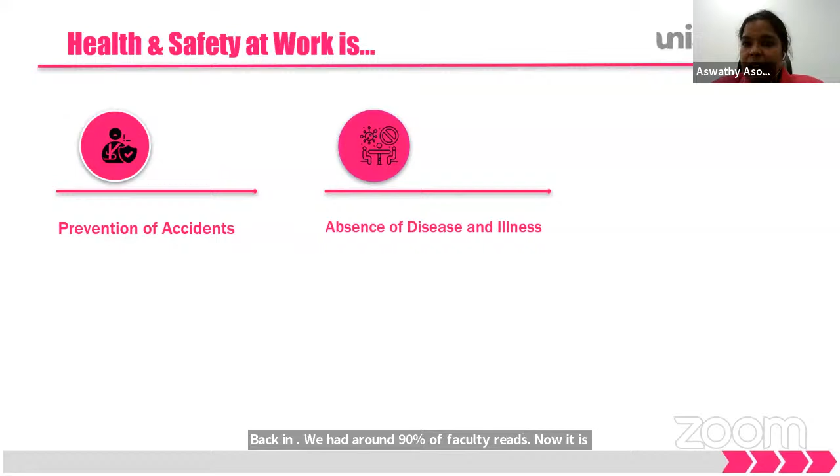From what I've understood from the industry, health and safety is very important. Back in the 90s, we had around 90% fatality rates, and now it's reduced to 75%. So why are we still focusing on health and safety? Because there are still lots of fatality rates. If you are alert and cautious enough while working, taking care of yourself, many simple things can actually make a big change. This is why health and safety is very important.

So what is the main factor? What do you need to look at? Make sure there are no accidents, we don't need any accidents, and we should make sure there is no absence due to illness.

Then we have to consider physical and mental well-being. Over the years, I've seen that when people speak about health and safety in any industry, they speak about accidents and physical injuries, but no one ever bothers about the psychological issues and psychological injuries. These are also equally important as accidents or physical injuries.

So what to be done, and how? In order for a team member or worker to work properly and happily, his working environment should be good enough and encouraging, so that the worker's productivity can be increased. So health and safety is not just about physical injuries and illness—you also have to look at the physical and mental well-being of the people.

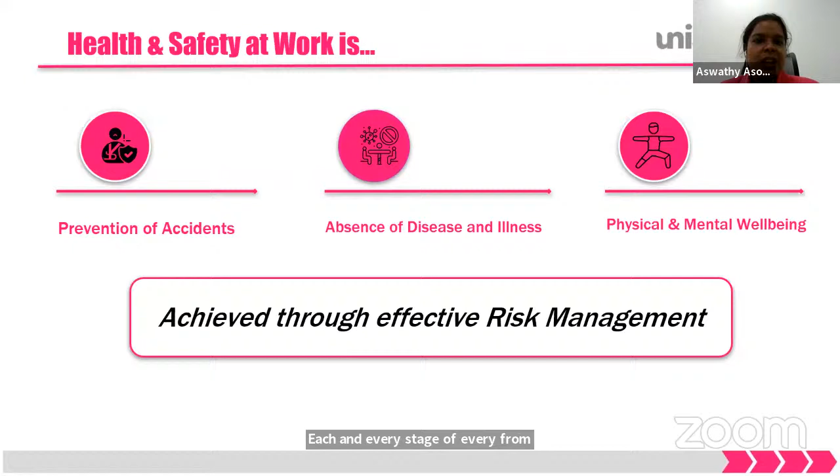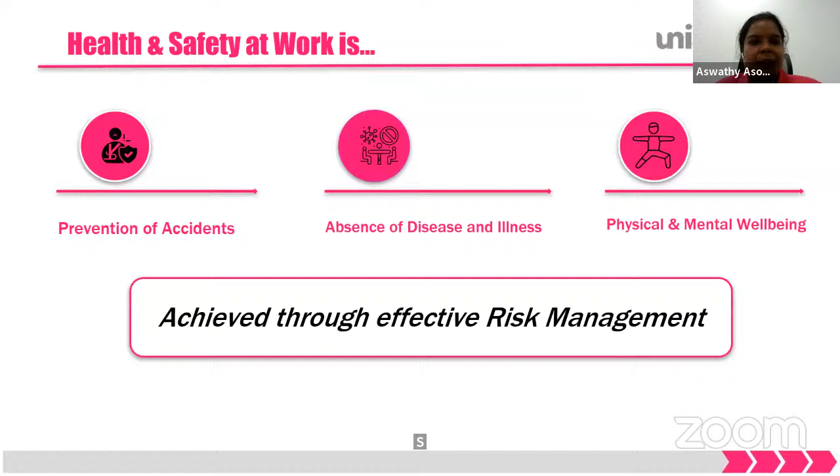No—health and safety, method statements, risk assessment, everything has to start from stage two of the RIBA plan of work. What is stage two? The moment you start designing the building, once your objective is clear for what reason you're constructing that building or utility, you have to have an idea about the risks involved—during implementation, after construction, during maintenance. So from the design stage itself, health and safety has to be considered, with a proper risk assessment before starting any work. Health and safety should begin from level 2 of the RIBA plan of works.

Now, what is HSE, the Health and Safety Executive? They are the monitoring committee. What is their responsibility, what do they do? They give us a proper policy, they check, they give us proper communication to make sure they lead us as an example. If any issues happen, like an accident, they cooperate, they comply with the rules and regulations, and they inform us what has to be done.

And then you plan the works ahead—if you face a new issue, you understand the problem, you plan ahead, you think before you act. This applies even to minor things. For example, in many residential buildings, if you go to a building and get into the staircase, you can see that the landing has been kept as a storage area.

They keep all their cartons, waste and debris and everything. Let's say there's an electrical short circuit, due to which the lifts will not be working at that time. Then the only emergency access is through the staircase. How will people move out safely? So these are things we can actually prevent. It shouldn't be there at all. If you look into it, it's very simple and completely avoidable.

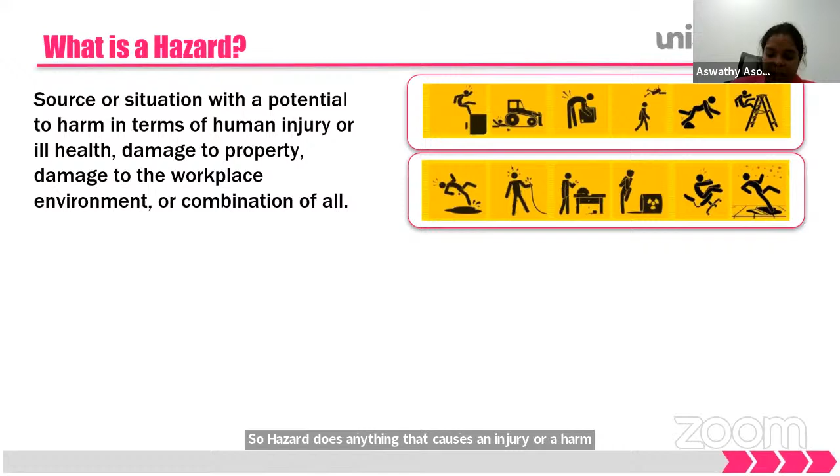So it can be broadly classified into different categories. One is physical hazard, basically moving parts, height, noise. Biological viruses, as you know, COVID, Nipah, many kinds of viruses. And you have chemical spillage, paint, asbestos, or any other kind of thinner, these kind of things.

Then ergonomic, it's basically improper workstation. You are not given a proper height, not sitting in a proper workspace wherein, according to HSE rules and regulations, each and every employee, if sitting in a workstation, has to have at least a 1 meter square area for relaxed sitting. Whether the chair is good enough. When using a laptop, make sure the screen is exactly straight to your eyes. You're not bending yourself so that the spine is not affected.

As I've already told you, psychological effects in construction industry are quite common. We are trying to become very polished and professional, but mind you, any part of the world you go, for the construction industry, we are still in the barbaric period, to be frank enough. Not even 19th century. The people are being abused. They just shout to each other. They don't understand each other.

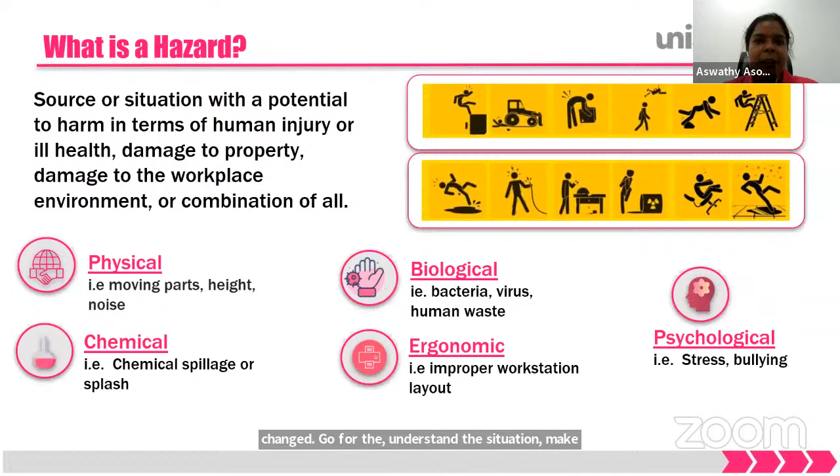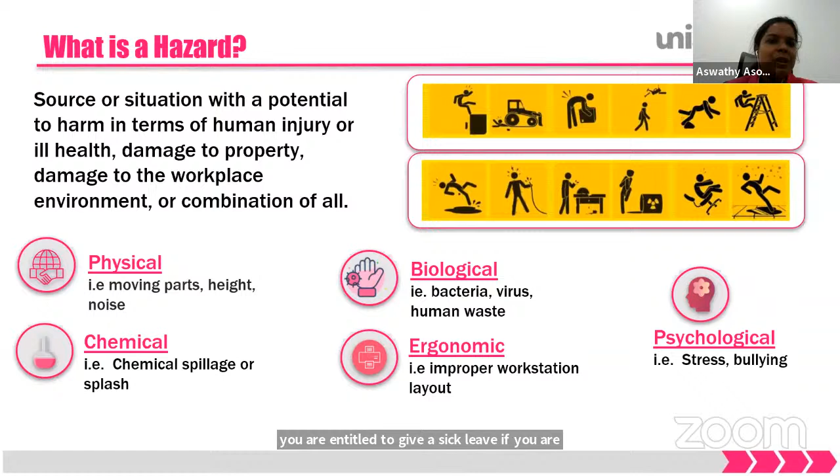Speak politely, professionally. If it is not done, give a memo, make sure a warning is given. Every time, you don't need to shout and fight to get the works done. So stress and bullying is again a major psychological issue. In England, you get stress leaves, because you are entitled to sick leave if you are completely stressed. But in the Middle East, I fear whether you have that, and I literally fear if it is there in other Asian countries also. So these are the various hazards involved.

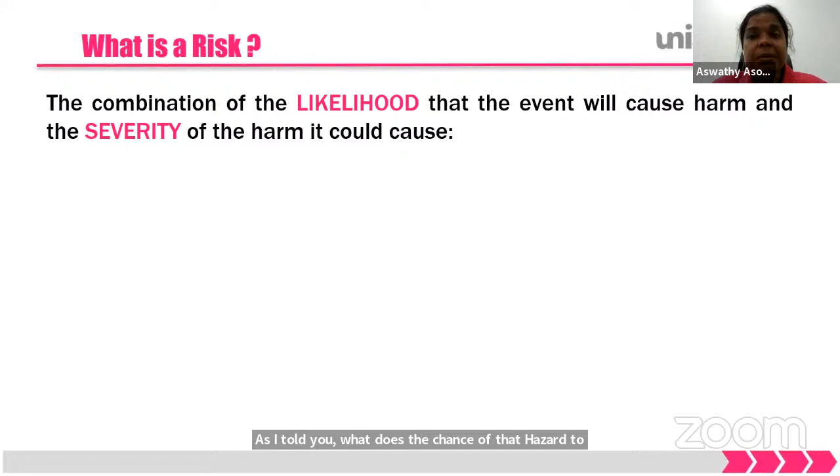Now, what is a risk? Let's explain further about risk. Each and every, as I told you, hazard has a chance of taking place, or a frequency of how many times it takes place. That chance is basically the likelihood.

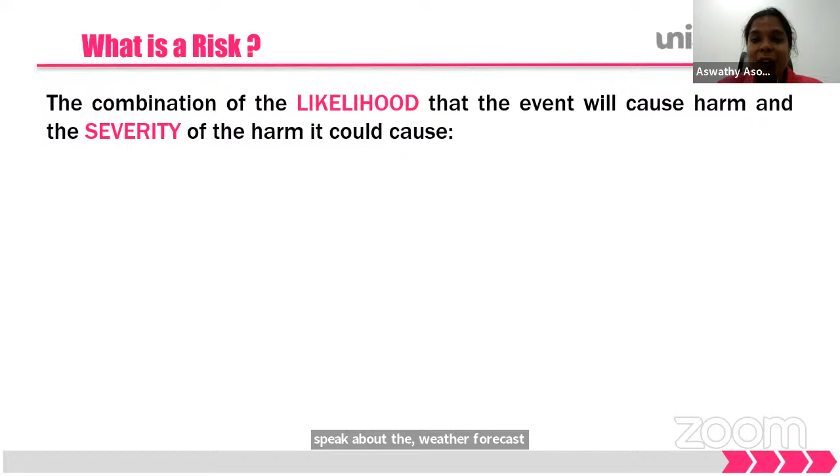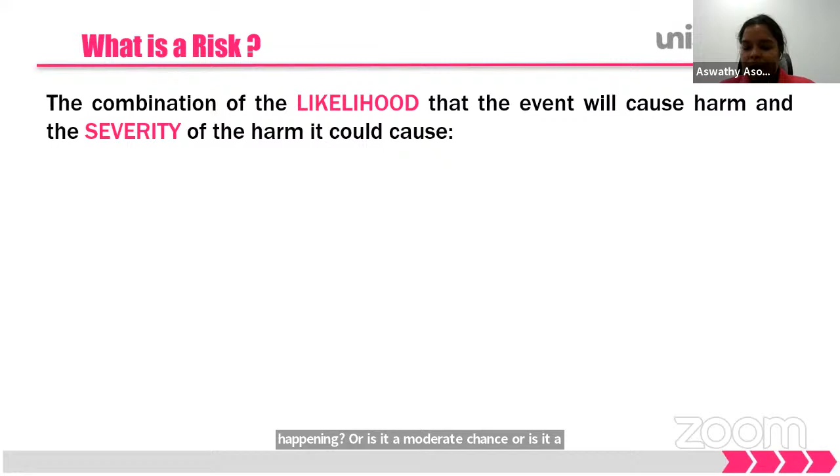Is there a high chance to do it? For example, the same way we speak about the weather forecast, is there a high chance for a thunderstorm happening, or is it a moderate chance, or is it a minimalistic, small chance? Similarly, we have high risk, medium risk, low risk.

So what are the high risk works? The high risk works are like working on an elevated platform, like rope work and all. And if you are working with anything underwater in a confined space, those are high risk.

So in order to identify what all are high risk activities, low risk activities, and medium risk activities, you need to have a proper risk assessment. Identify the issues, classify whether it is high or medium, then understand the frequency of how many times it is happening, and what are the control measures you take.

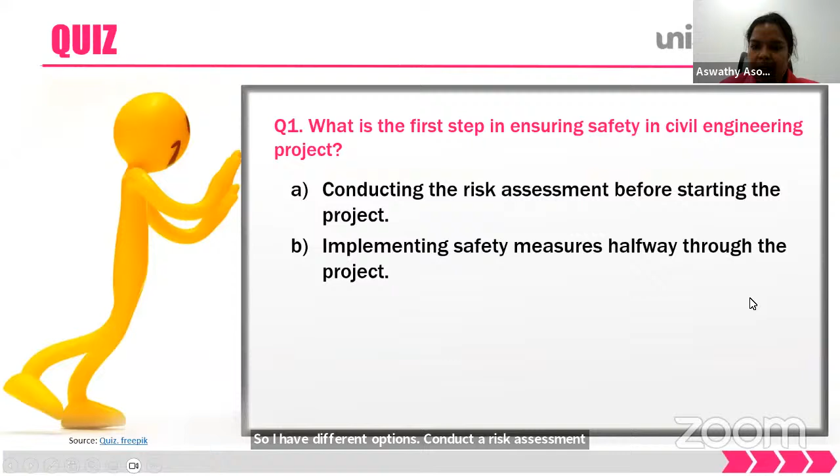What is the first step in ensuring safety in a civil engineering project? I have different options: conduct a risk assessment before starting the work of the project; implement the safety measures halfway; wait for accidents to occur before taking any safety measures; or rely solely on personal protective equipment to prevent accidents. Please put your answers in the chat box.

Let's repeat the question again. What is the first step in ensuring safety in a civil engineering project? Option A is conducting a risk assessment before starting the project. Option B is implementing safety measures halfway through the project. Option C is waiting for accidents to occur before taking safety precautions. Option D is relying solely on personal protective equipment to prevent accidents.

We can see many participants putting their answers in the chat box, and most of them are opting for option A, conducting the risk assessment before starting the project.

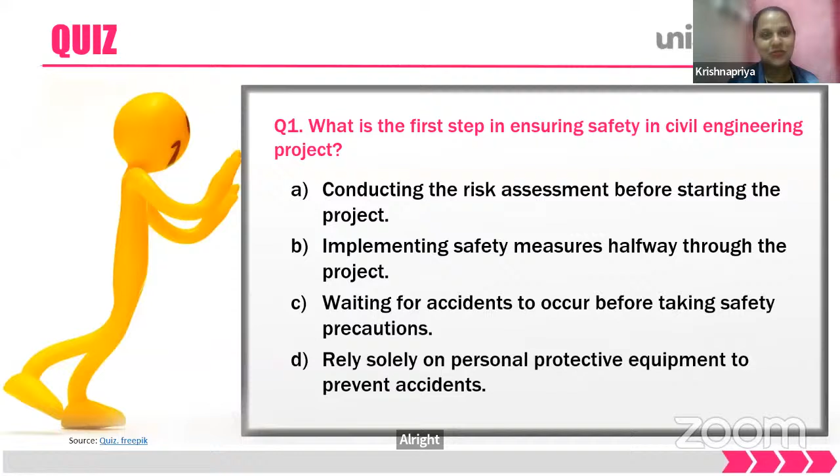Wonderful, very good. I don't know from which background you guys are coming, so I would take it as a personal comment that you are all listening to me. Yes, all are listening and they are putting comments for each of the questions. Thank you for letting me know about that.

Let's go for the next question. If the previous question is done, which is the most effective way to ensure safety in construction? Again, four choices: relying solely on safety regulations and guidelines; conducting safety inspection only after the project is completed; incorporating safety into the project design and planning stages; or ignoring potential safety hazards to save time and money.

It's a bit of a tricky question, so you can give two answers if you want. Dear participants, please put your option in the chat box. We have four options, I hope the question is visible to all. The question is, which is the most effective way to ensure safety in construction?

Okay, we are getting answers. Most of them are going with option three, incorporating safety into the project design and planning stages. Very good, so basically the answer is incorporating safety into the project design and planning stages itself. That's where you have to start, and it's the most effective way to ensure safety in construction.

How many answers did we get, like how many hands, if I may know? Many of our participants have responded in the chat box. Roughly, since I can see around 286 participants, so at least 100. We cannot count the exact response participants right now because it's a chat box. Okay, no worries, I just wanted to know the response factor, to know whether they're still there or have left.

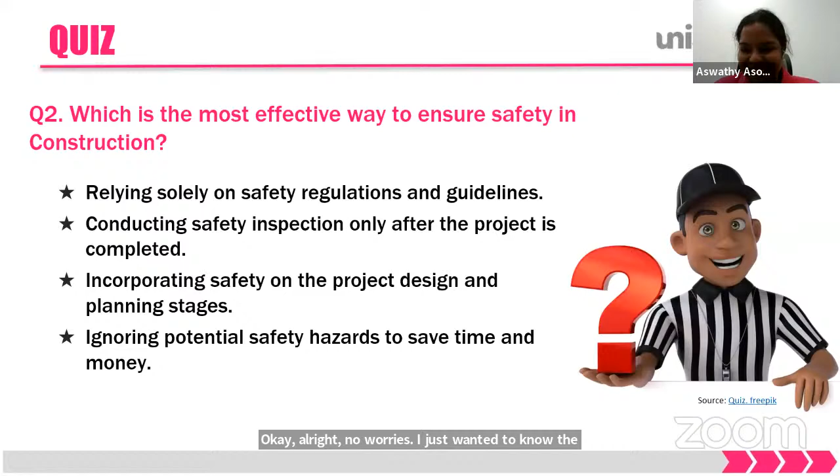Before starting the next one, I just wanted to ask, is my pace of presentation okay? Is my pace of lecture okay? Am I a bit too quick, or do I need to slow down? Is there any comment on that?

I think you can go ahead. Okay, Sashi, all right, it's okay. Thank you, if people are responding that it's okay. You're doing great. Wow, that's great. Thank you to know about that.

All right, so let's see the importance of health and safety. I'm not speaking extensively about every health and safety topic, it's practically impossible for me to explain here. So what I'm doing is I've identified a few important things for general awareness, which are usually happening in the industry, and we'll discuss that, then get into the environment part. So let's see the first major issue, which is a high hazard one.

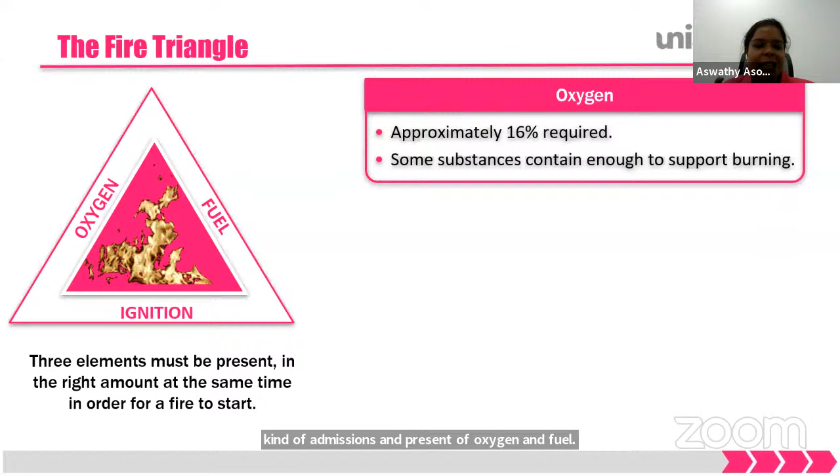It's basically the fire triangle. Fire is a major issue in the construction industry. It can be because of short circuit, or many reasons. So how can we stop it? How does this fire occur? The fire occurs because there should be a kind of ignition in presence of oxygen and fuel. How does it occur? Only if 16% of oxygen is present at ignition, then only does fire occur, and it should be highly explosive.

So what fuel is needed? It can be solids like wood, plastic, paper. Gases like petrol, gas, acetylene, poisonous gases. Then liquids, you have kerosene, varnish, turpentine, paints, which is generally used in construction. And if the heat is quite high, especially in the Middle East, the ignition can take place immediately, even for paper, because high intensity heat can cause ignition.

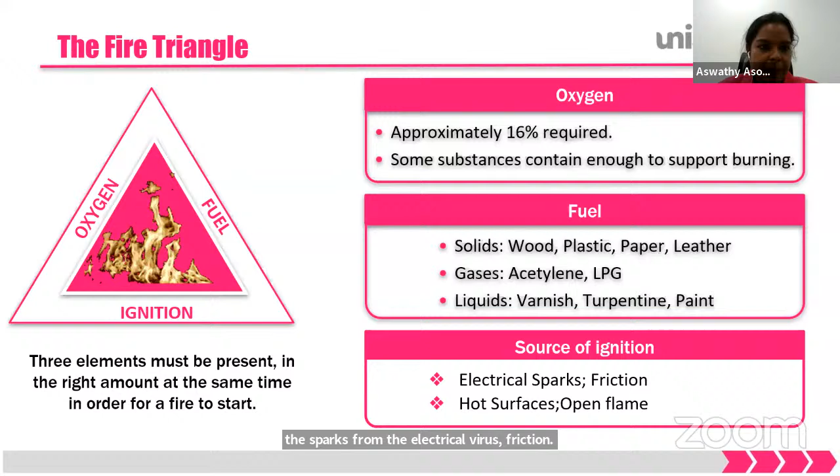So how does the ignition come? It's basically because of sparks from electrical wires, friction, hot surfaces, open flame, anything. So what do you have to do if there is a fire?

This is something everyone knows, but I'm telling you because when we conduct a fire drill, people just directly go to the lift, switch it on to go immediately, or they try to become very generous to help their fellow mates, acting like they are supporting and making themselves look big. To be frank, please don't do those things. If there is a fire hazard, just run.

Run means make sure you walk briskly, alert everyone that there is a fire, so pull the alarm first. Wherever you see the exit, just exit the building to the nearest safe area where they've already kept a board showing that this is an assembly point. Go immediately to the assembly point. You have to use only the fire extinguisher if you are trained to do it, otherwise just walk out immediately.

Because the doors used in buildings are at least 60 minutes fire rated doors. That is the requirement of municipality or the standards set, whether BS standards, Indian standards, or UAE standards. You have to have a 60 minutes fire rated door, which is basically for you to escape. So if you know how to use a fire extinguisher, use it, otherwise just leave it. If you are really confident, then do it.

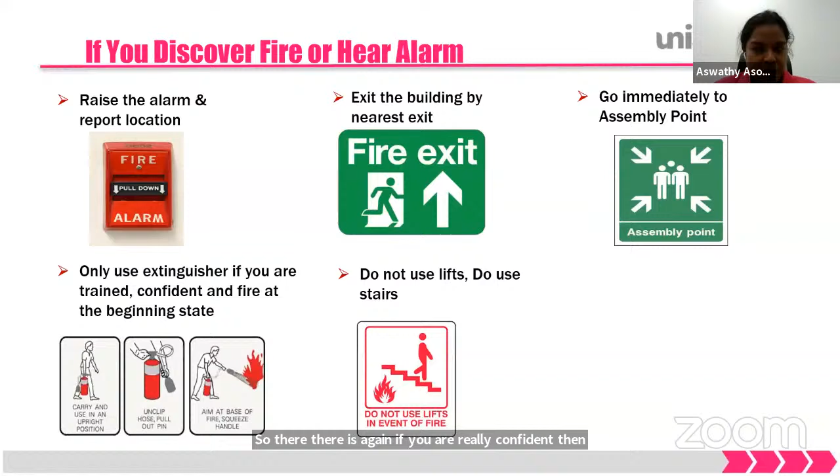Do not use a lift, go with the stairs. And if you are safe, then only assist the differently abled people or anyone who needs help. First, make sure that you are safe enough to save others. So this is how we actually have to respond if there is a fire.

Now, working at height. Working at height is one of the major issues when you look into the records, the data, the journals. You see that 70% of accidents occurred mainly because of working at height.

Again, you expect that working at height is like cleaning the facade, standing elevated on ropes, at a height of 15 meters, 25 meters, 30 meters. No, it is purely not the case. The most fatality rates are coming from working at height, falling off from a height of just 1 meter, 1.5, maximum 1.5 meters, and workers are severely injured.

So why is it like that? You have to make sure proper precautions are taken, and we work accordingly, thinking in our mind that safety is ensured. So what are the hazards involved?

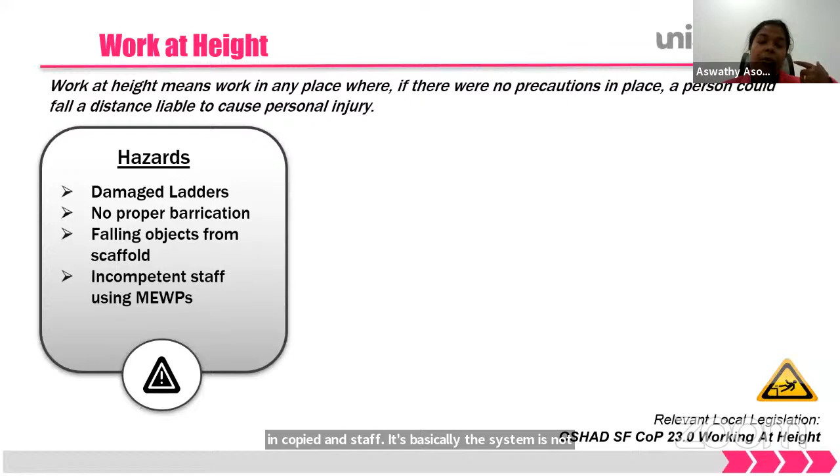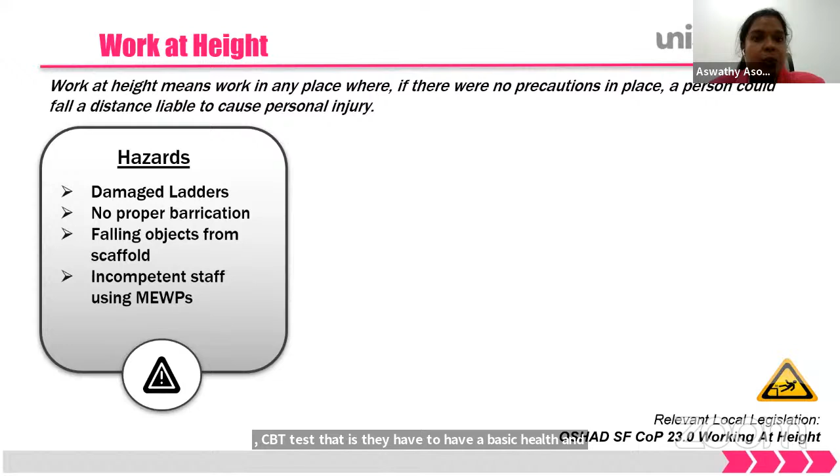If you go to Asian countries, the workers and laborers are completely illiterate, and they come to earn their daily living. So you can't complain that they are unqualified and incompetent, because the system is not there. Whereas if you go to England, anyone who works in the construction industry has to have a CBT test - a basic health and safety course. They have to pass a test in order to start working in the construction industry, which I've not seen anywhere else. That's again a system issue.

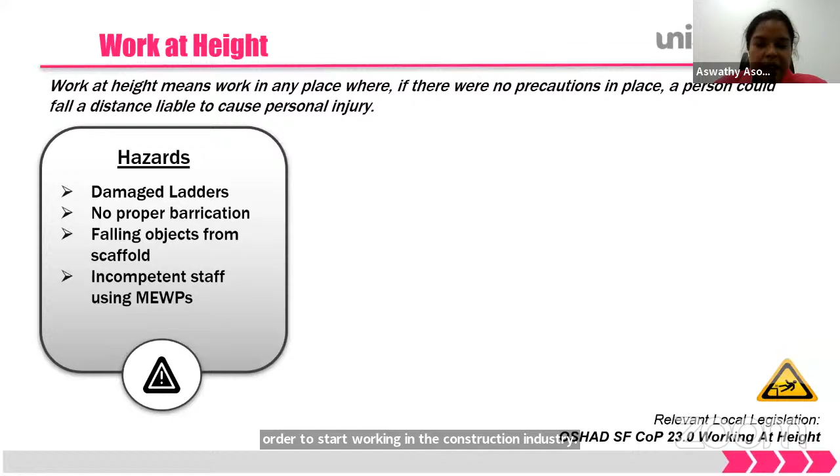So these things are happening mainly because of incompetent staff using mobile elevated work platforms and all those things. How do you control it?

Try to eliminate wherever it is possible. The first time, workers will be negligent, they're ignorant, they don't want to listen. Keep on saying, implement, make sure the action is done, penalize them, give them warnings. It's a gradual process, but over time things can become better. Make sure you have a safe system of work, equipment selected correctly in accordance with health and safety, and do periodic inspections like PAT tests.

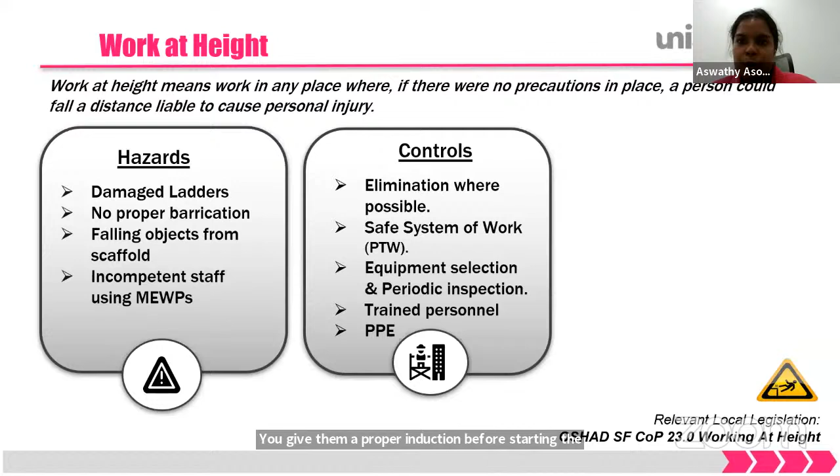Have trained personnel to train them. Give them proper induction before starting the work - tell them these are the issues, this is what you need to do, make them aware. Make sure you give proper PPE, personal protective equipment.

Now what are the risks involved? Falling from height results in fatalities. You may die, you may be bedridden for your whole life, or you may have a severe spine issue.

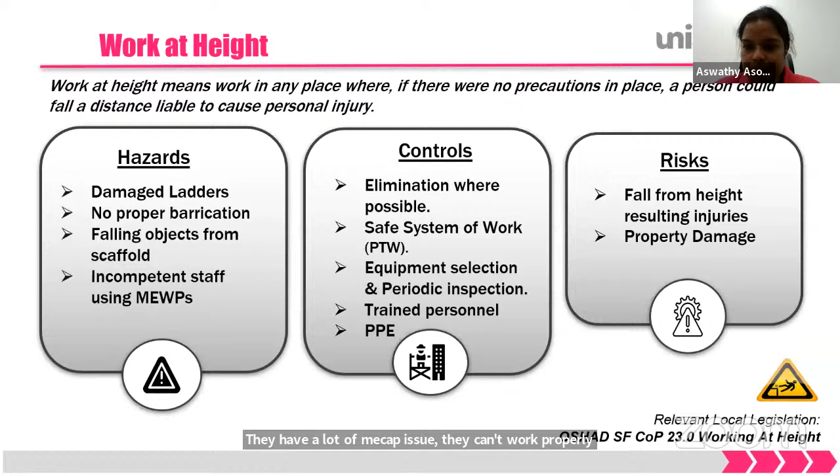Let me take a flooring example. A carpenter or floor layer is paid very high in European countries because their charges are high. What they do is fit a carpet and use their knee to hit it hard. They start this work at a very young age, 15, 16, 17, and by age 20 to maximum 30, they have a lot of kneecap issues. They can't work properly and aren't fit to work further. These kinds of issues have to be addressed.

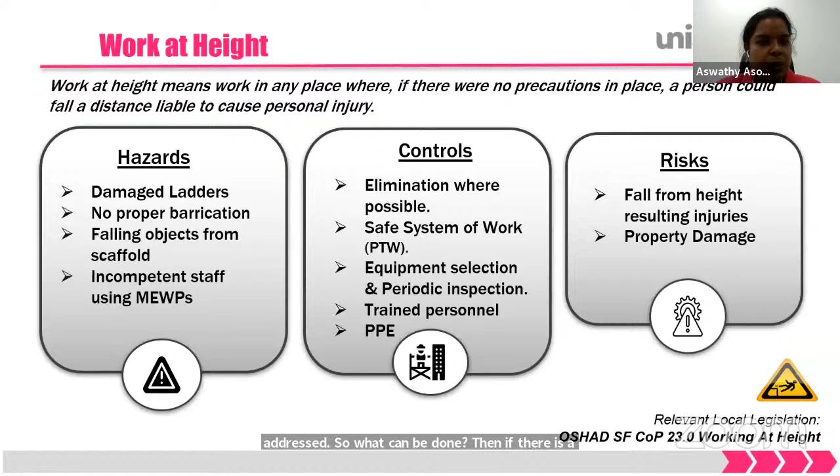So what can be done then? There's also property damage risk due to the work involved - these are the risks involved. Now, ladder safety - how to work efficiently.

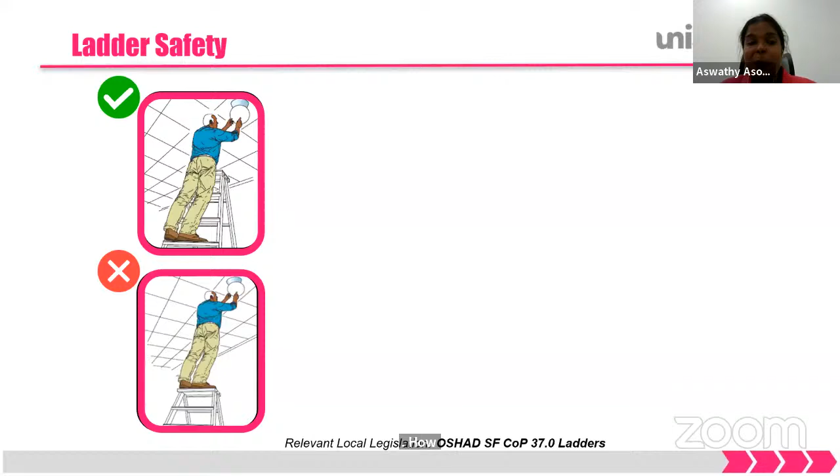You might feel it quite funny when I show you these things, but trust me, I have seen in several places that people are not using their ladders properly. Most people are not allowed to work with their feet on the highest elevated step at the top of the ladder. You should be working at least 3 to 4 steps beneath the top of the ladder.

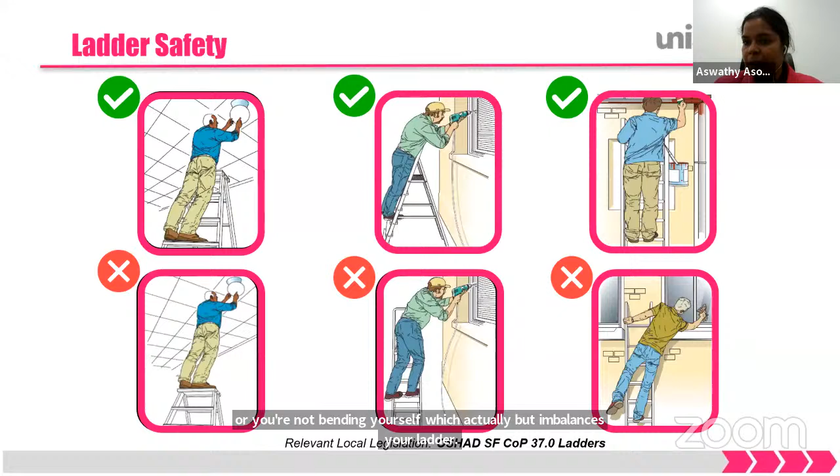Make sure that when you drill, the system is directly straight - you're not inclining or bending yourself, which actually imbalances your ladder and creates a high chance of falling. Make sure you're keeping your paint stand next to you so you can easily paint, and change position if you want to. Just focus on one segmented area. If you have to overextend or bend yourself, just replace your ladder position.

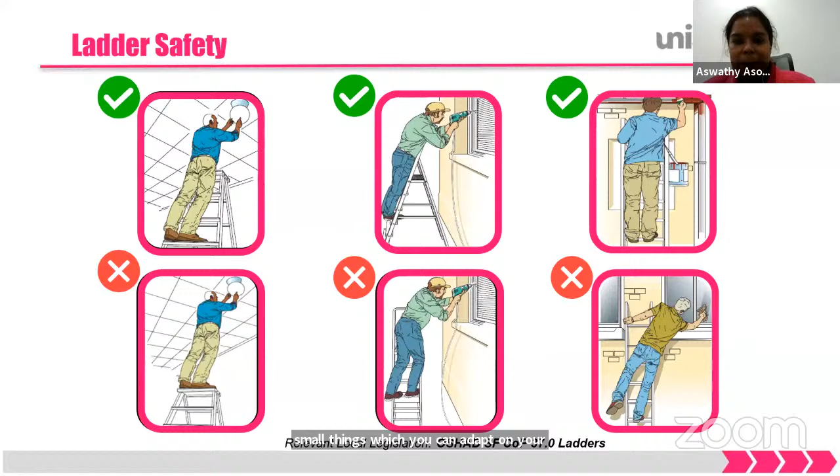So these things might feel quite adventurous to skip, but unfortunately it's not adventurous - it's just causing harm to your health. At a young age you won't realize it, but after your mid-30s and mid-40s, you will literally regret all those things. These are small things you can adapt into your day-to-day routine and explain to workers. Once this becomes a practice and a habit, then it will be good.

There will be hardly any issues.

Now let's take, when we spoke about working at heights, we covered ladders. Now let's speak about scaffolding. When it comes to scaffolding, where do we put it? On facades, to make sure that when we apply concreting and all those things, we need scaffolding.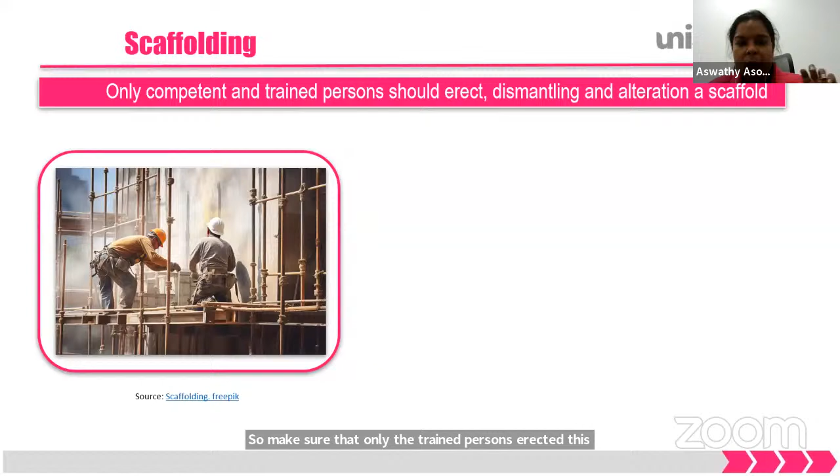Make sure that only trained persons erect it, dismantle it, or alter it, where you check the tag to confirm it is inspected and ready to use. There should be hardly any corrosion present, it should be tight and not loose. Make sure you have a proper method statement or standard operating procedure to work on it.

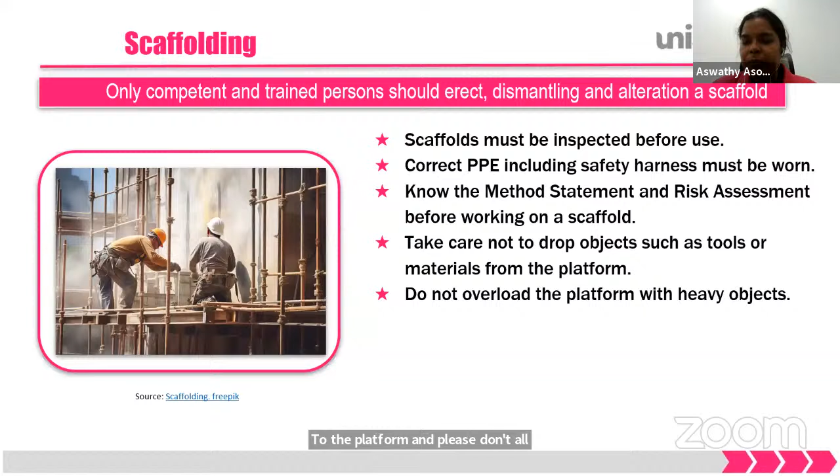You have already conducted a risk assessment. Take care and be aware that you are not dropping off any tools. If you are dropping off tools, there should be a net or other precaution measures so it will not fall down to the platform. Please do not overload the platform; take only the required tools needed. Do not overreach or overstretch yourself.

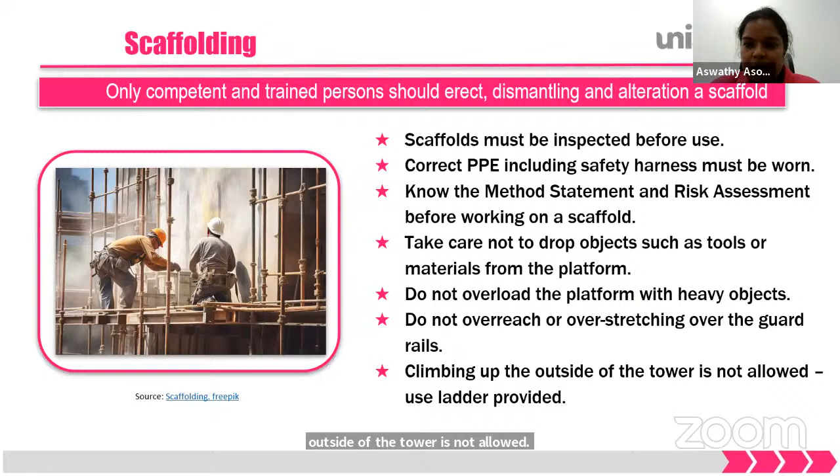Climbing up outside of the tower is not allowed. Use only the ladder provided. So make sure you do it safely.

Now the next one is mobile elevated working platforms. This is what a mobile elevated working platform looks like. This is basically used to clean facades, or you can use this for checking the structural stability of your facades. So basically it is used for external purposes.

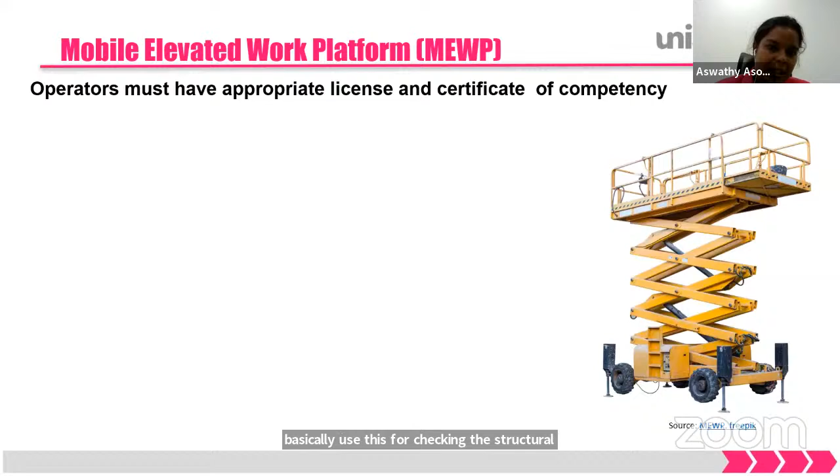So how do you make sure it is safe for our workers to work? It should not be placed in a confined area. The ground conditions should be good enough, firm, level and straight. The outriggers, that is where the wheel is lifted up, should be supported by four shafts.

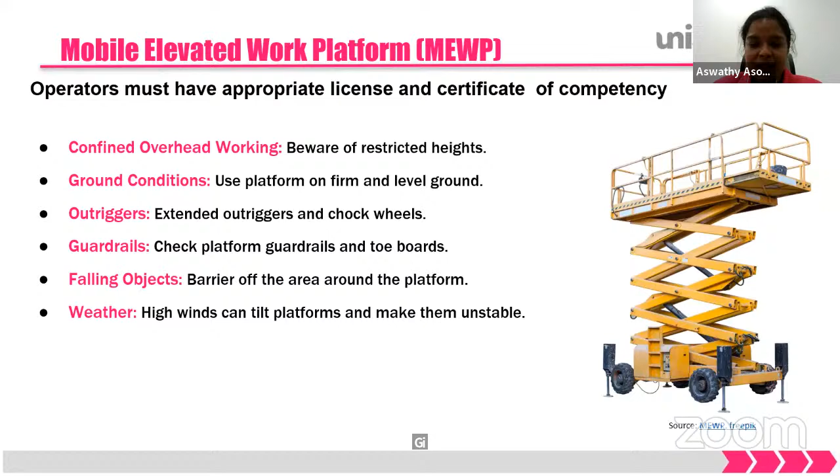You have kept a guardrail with the toe board and signage showing that work is in progress. You have preventive measures showing the platform barrier, a specified space given around the platform. Make sure you are not working in high wind, and handling materials are clearly distributed. Check whether only required materials are kept, sufficient for the work.

So basically, whatever method statements we discuss, the procedure is almost the same. All you need to do is identify hazards, make sure you're taking care of yourself, and you're not making a mess around. Please don't create a mess around. So if you have any nearby hazards, make sure you do not operate this mobile elevated work platform.

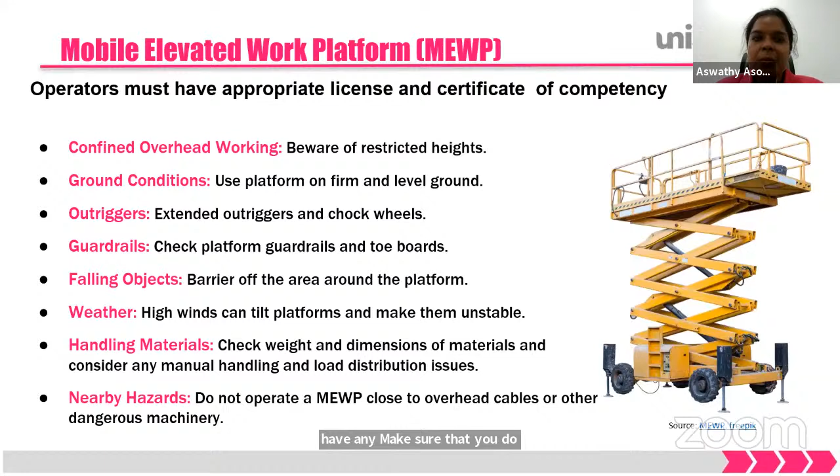Whoever is doing the rope cleaning has to have a Level 1 certification, and they have to be supervised and monitored by a supervisor who is accredited with IRATA Level 3 certification.

The procedure is the same thing: know the method statement, risk assessment. Make sure all the ropes are fit for purpose, tested, and have valid certificates. Continuously monitored by the supervisor. Make sure you have periodic inspection on the equipment, accessories, reports, and defects. You're not working during high wind time. There should be a proper emergency rescue plan in place, and make sure you have suitable PPE in order to work.

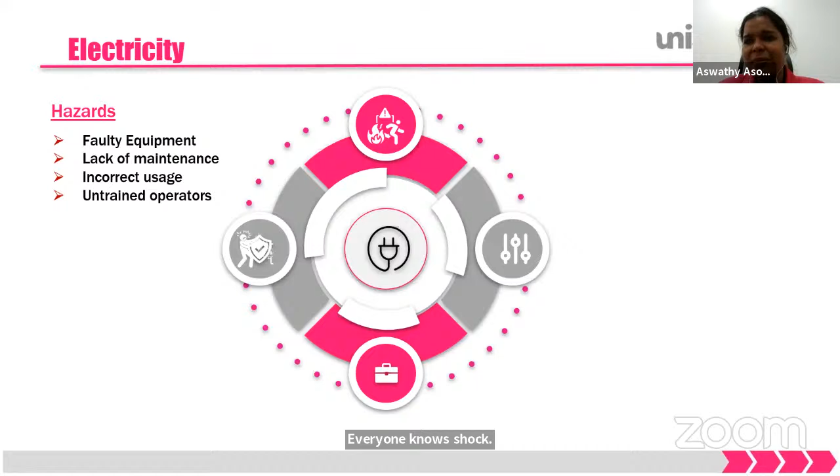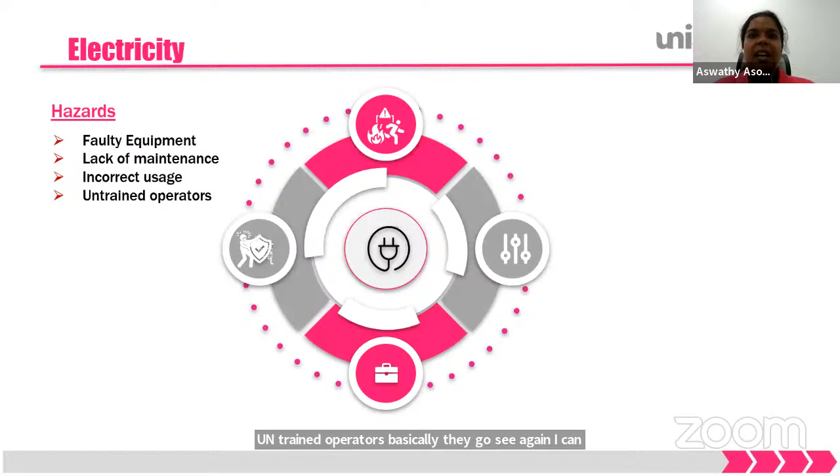Now the next high hazard observed is electricity. In the case of electricity, everyone knows about shock, faulty equipment, and no maintenance done. Incorrect usage of equipment, untrained operators. If it's a trained, skilled worker, diagnosing or identifying the issue just takes a fraction of a second.

There are places where, if you are looking into this, a trained skilled professional may charge high, but the time required for him to inspect and detect the issue and come up with a solution will be a fraction of the time as compared to a layman.

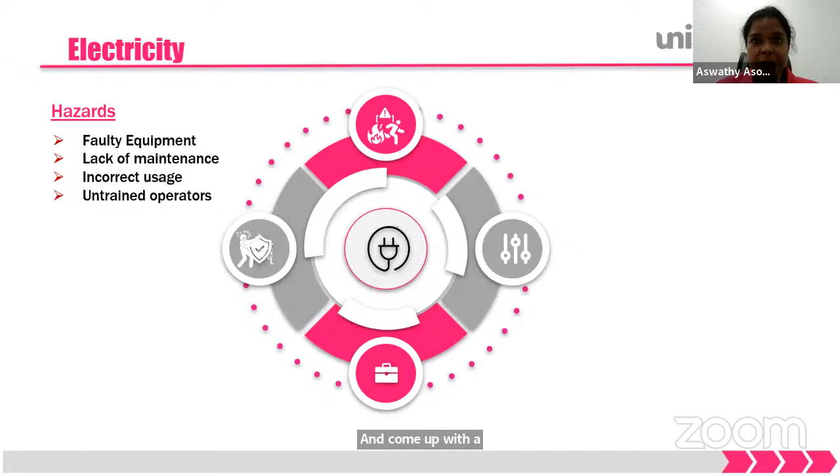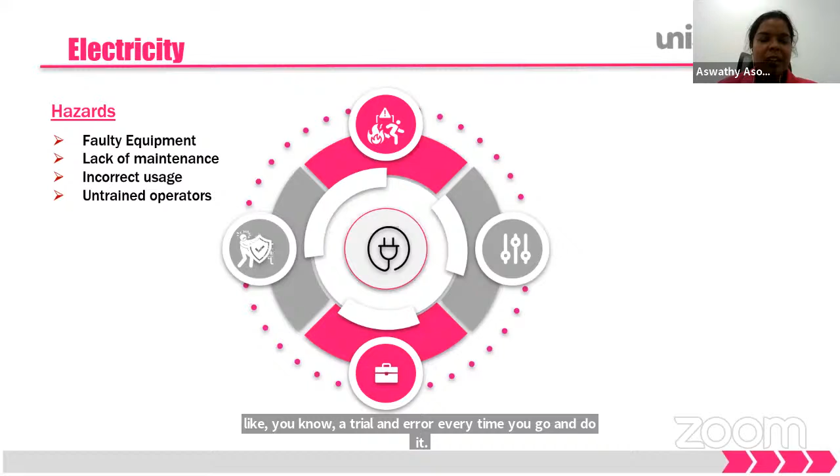For a layman, it may take a lot of time. It may involve trial and error, where every time you try something it does not work. So always make sure you have trained professionals to work on these things, because these are high hazards, and electrical shocks, burns, and fire are the risks involved.

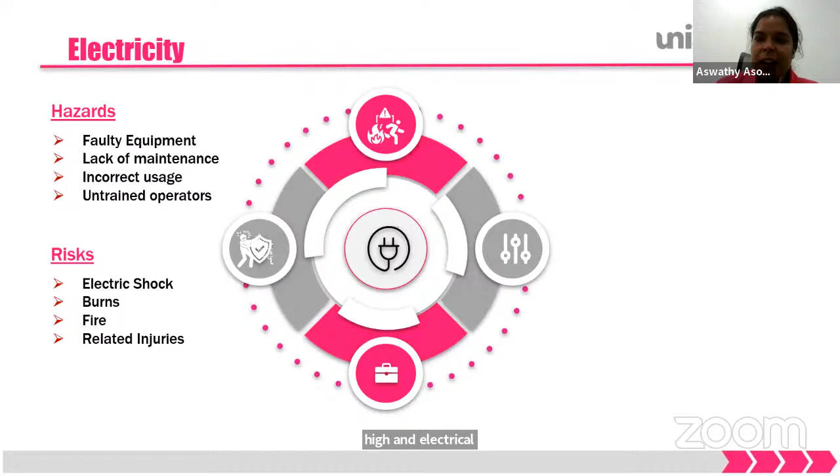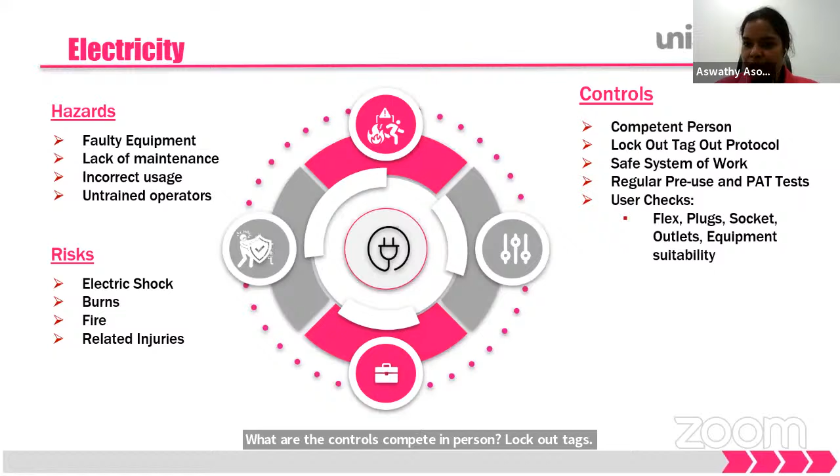What are the controls? Competent person, lockout tags, safe system operation procedures. Make sure you are checking pre-inspections. You have to check the flex and intensity of the flex, and make sure that the plug, socket, outlets, and equipment are all in working condition.

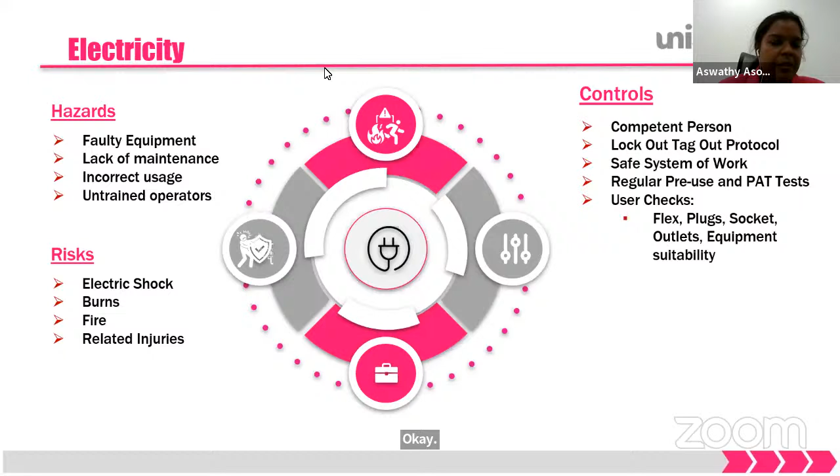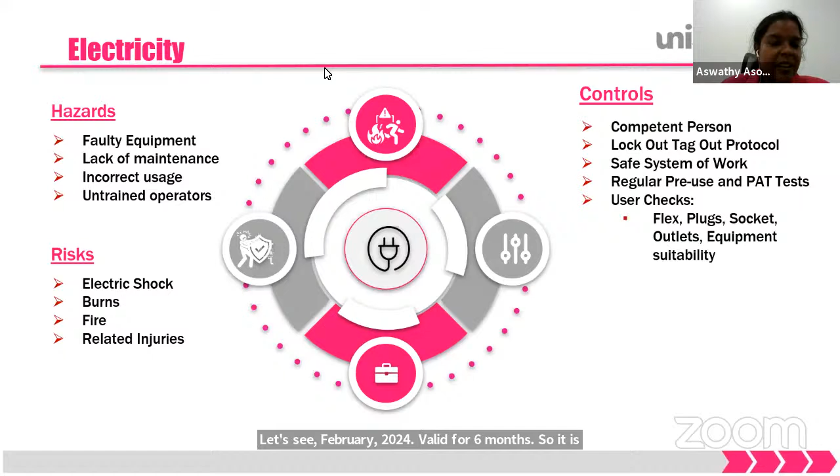Conduct a portable appliance test, because even in offices, if you are using a laptop, they have a PAT test clearly written on it - checked on, let's say, February 2024, valid for 6 months, so valid till August 2024. Make sure the PAT tests are not expired.

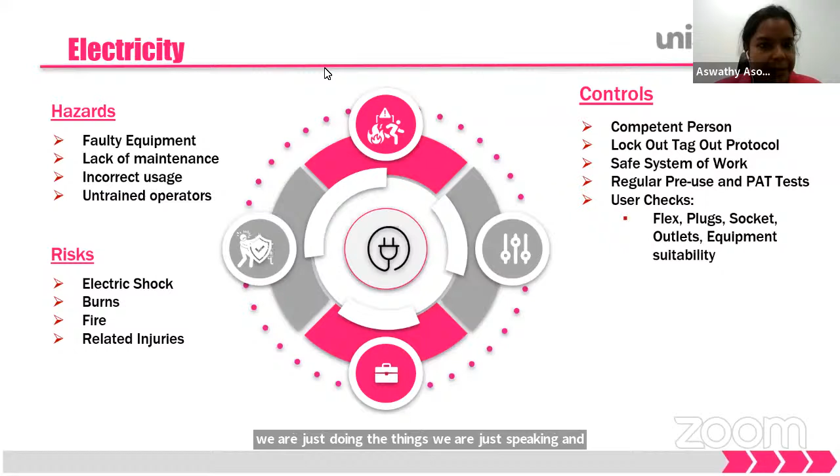Regular monitoring is not a Herculean task, and we are not inventing anything new. We are just doing a simple procedure - repeating, monitoring, and reviewing the things. We are just speaking and making them aware so that this becomes a habit. Once it becomes a habit, the health and safety issues get minimized. That's what we need to do.

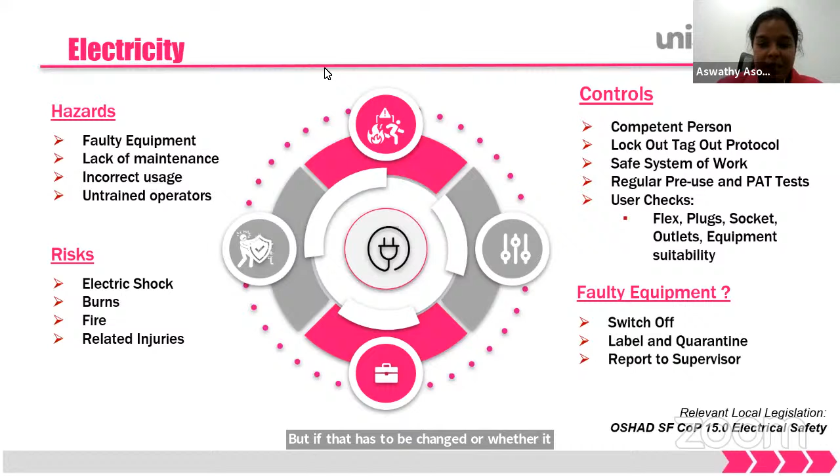What kind of faulty equipment is it? Whether it was switched off, whether it has to be changed or replaced, is it labeled and quarantined? Make sure that you report these things to the supervisor.

Then the next main thing is poor housekeeping. I literally wanted to ask you a very good question. If you are in the industry, I believe many of you are working in the industry - how many of you see your building, infrastructure, or construction site being very clean, if I may ask?

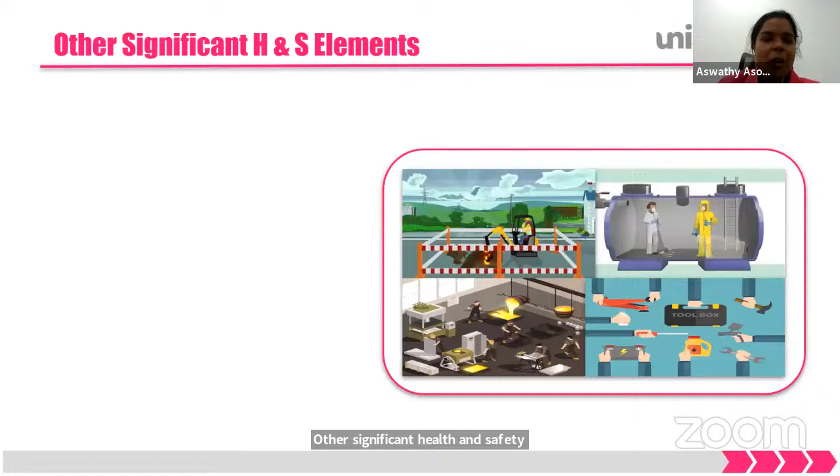Other significant health and safety elements. Okay, I'm just broadly speaking about other elements we have. Anything, as I said, risk assessment is very important. Make sure that you have proper PPEs.

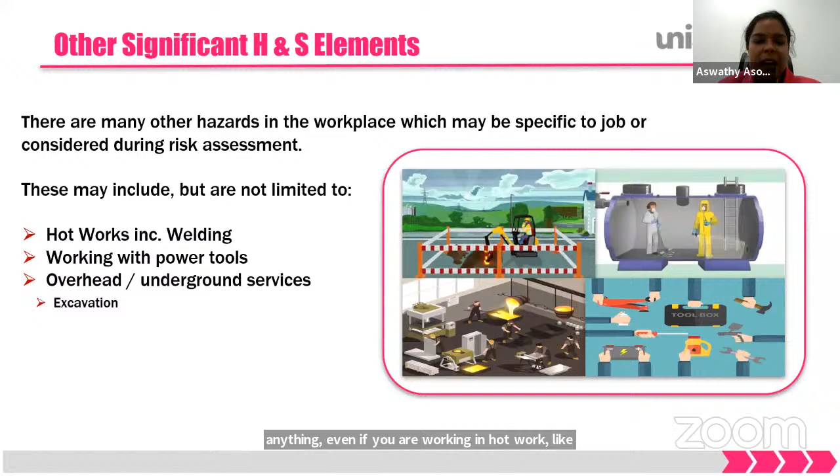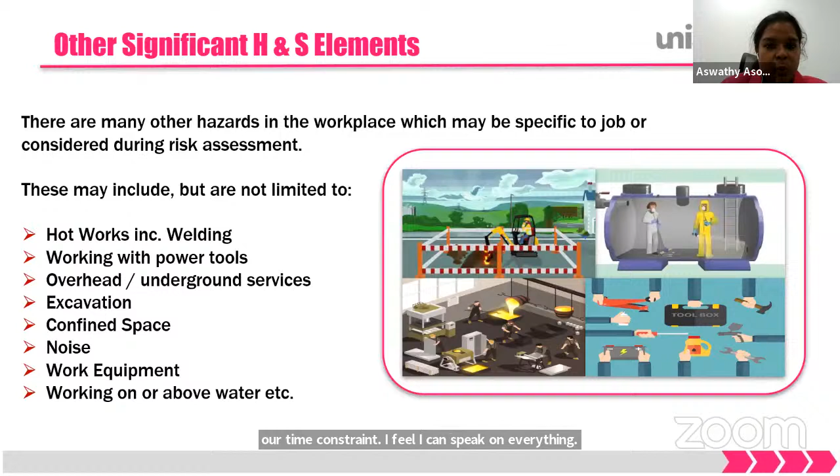Anything, even if you're working in hot work like welding, working with power tools, overheads, underground, excavation, confined spaces, noise, work equipment - all these are significant health and safety elements. Since we have a time constraint, I fear I can't speak on everything, so maybe next time we can discuss all these things in detail.

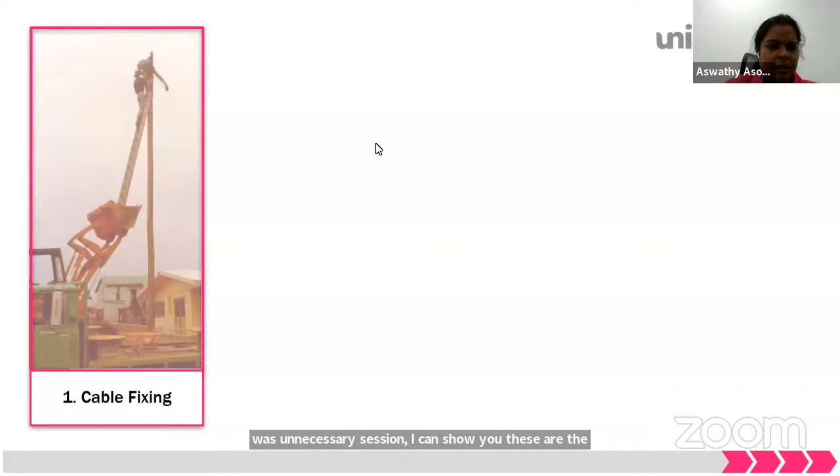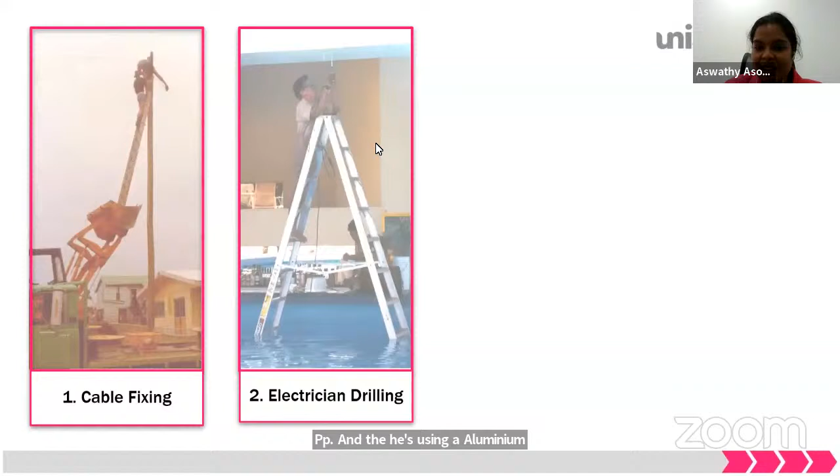If you think that this health and safety session was unnecessary, I can show you. These are pictures I've taken from online. You can see why this is important - why I've been explaining all these things. See how the excavator is supported, how a person is drilling - an electrician is drilling, he doesn't have any PPE, and he is using an aluminum ladder, and he's standing under water - high conductivity of electricity, no chance with this one. I really don't have to explain all these things, but this is what is happening everywhere.

These are not people trying to be innovative, they are just risking their life. So this is not happening in the barbaric period, this is happening now also. So this is something we are looking into. We have all means of health and safety measures. All we need to be is aware of what it is, how it is, and work accordingly.

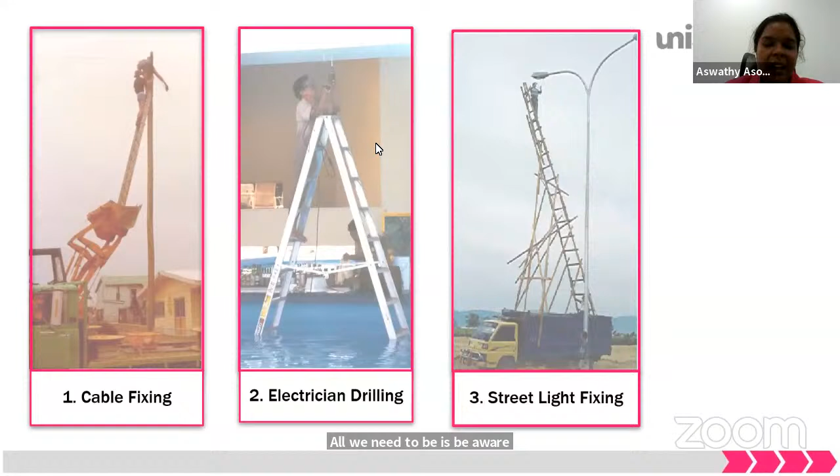Okay, so how to do it? Make sure that you have proper safety signages. How the safety signages are incorporated - if it is blue, means you have to adhere to the rules, you must do it. If it is red, means things you shouldn't be doing, it is totally prohibited. Yellow means it's a warning. Green means it is safe to do. So this is how you provide a health and safety sign.

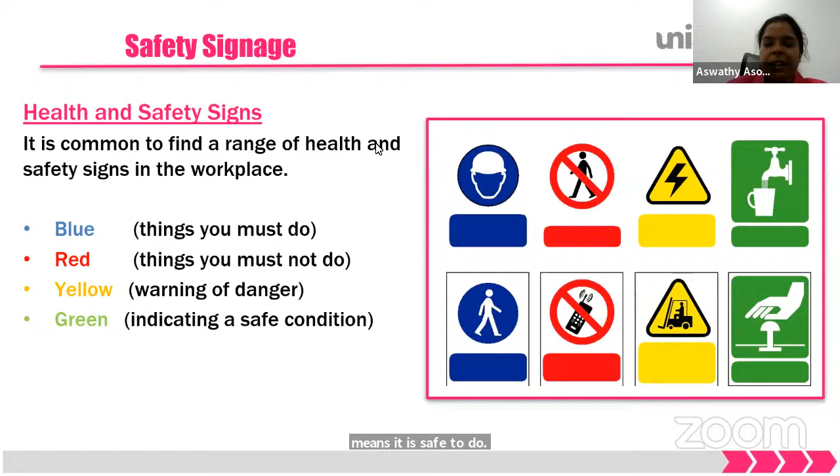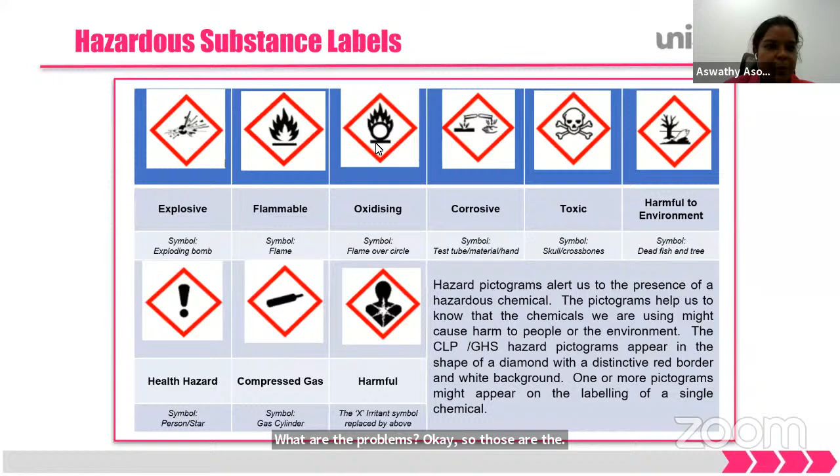Then what are the hazardous signs? You can see we always provide the hazardous substance signs in a diamond shape in red, showing whether it is explosive, whether it is toxic, or it is corrosive. And it clearly alerts all the people what the problems are. I think all the presentation will be shared with you. So these are the hazardous substances involved.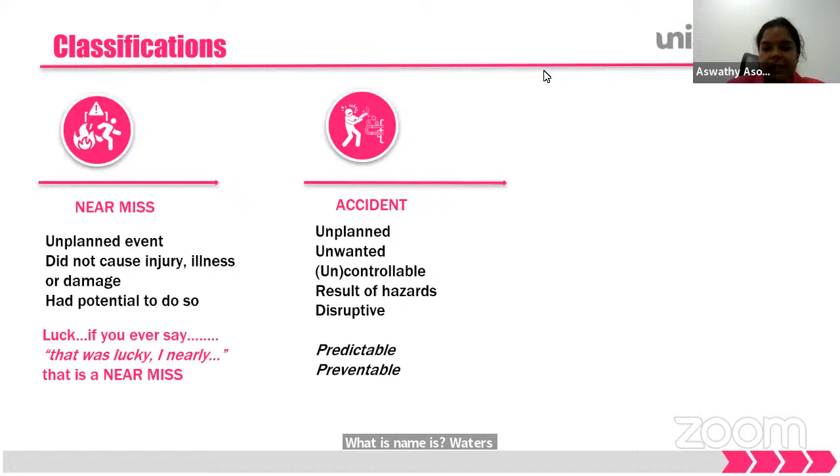So near miss is basically like, as I can give you one example. Again, it's not related to construction. A simple near miss example is a person walking around, a tenant from the building just throwing away dust or garbage. It's just a near miss that it didn't get thrown onto his head. So any chance of injury, you just luckily escaped. That actually has a potential to cause a fatality or an injury. Thankfully, it didn't happen to you.

Accident, which is completely unplanned. Let me take an example of a building wherein a facade glass all of a sudden has fallen down, and there was a person walking around, and it fell onto his head. This can be predictable, it can be unpredictable also. But this can be preventable.

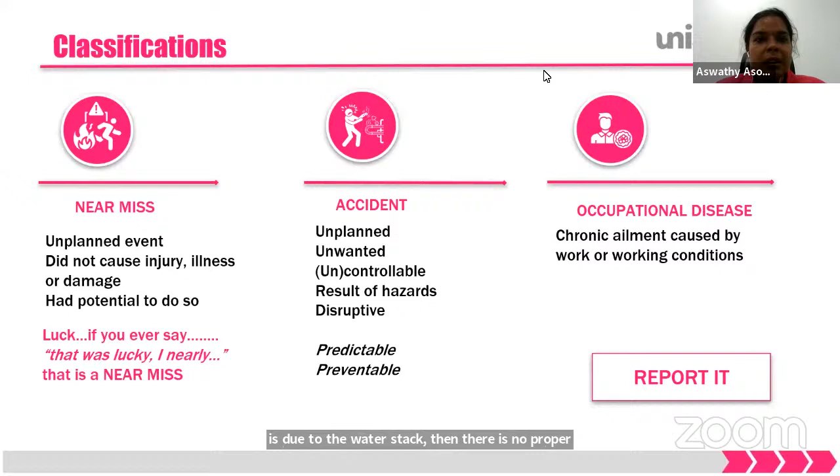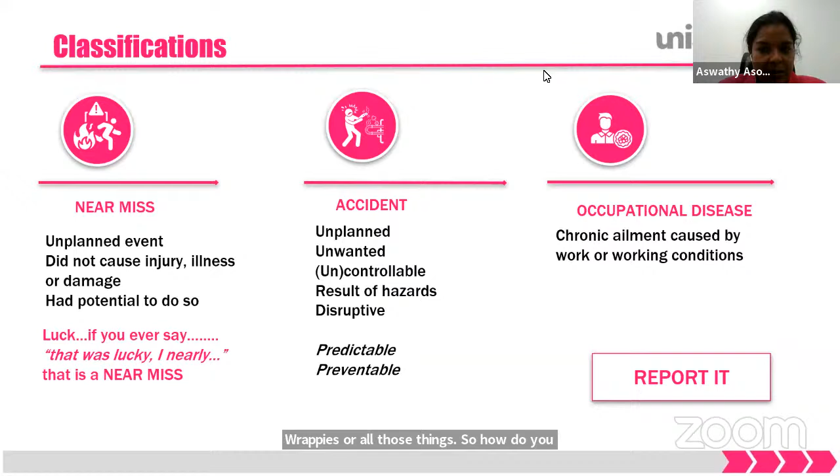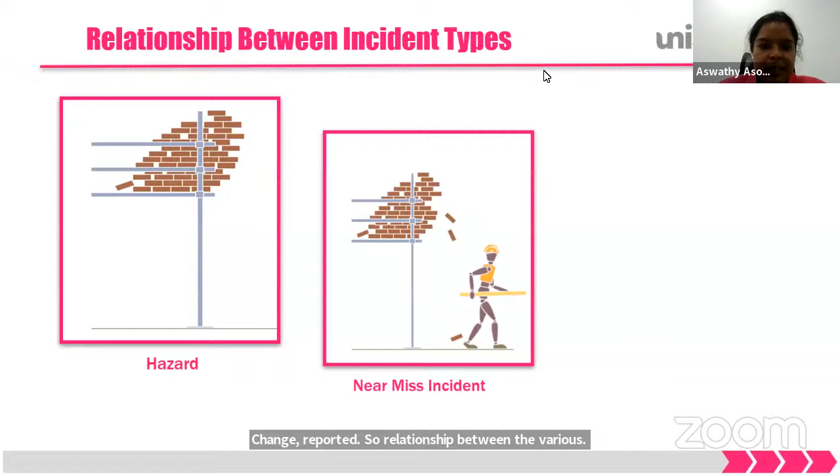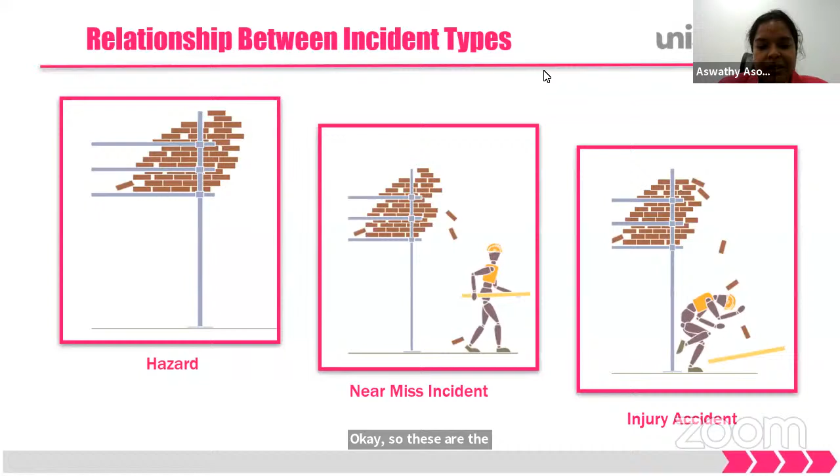So the relationship between the various types of accidents, as I said, hazards. See, you have not arranged the bricks properly. So the near miss is that the brick didn't fall on top of that person. Accident is clearly, yes, that brick has fallen on his head. So these are the relationships between hazards, near miss, accident, incident, and injury accident.

Now, accident investigation. For any accident, there are high chances for people not to report it. They might think it as a kind of embarrassment, or they don't care, they just continue with their work because of work pressure. They are quite afraid that if this accident has happened, it will literally affect their job and all those things. But please make sure that whatever has happened, report it.

Find out what is the root cause of it. Does it cause any environmental impact? Is it a material failure? Why did that happen? Find out what is the root issue. Whether he has taken any shortcuts, is it because of lack of understanding? Is it because he is not trained enough to do it?

Review it, review the process. If you want, do the change management. Review the process, come up with a new procedure, which is known as the change management process. Again, if it is a lack of training, provide training. So that's how you act for an accident.

Personal protective equipment is not a completely preventable safety measure, but it gives you minimum protection, that's all, nothing more. The risk is still there. For example, if you are working at heights, you will be having a 5-point PPE. What would that be? One will be your helmet, gloves, harness, safety shoes, and your glass eye protector. Most companies clearly focus on this 5-point PPE.

Why do we stress on 5-point PPE? If something falls on top of your head, it's always better to have less intensity. For example, if a tool or a plier falls on top of you, and if you have a safety helmet, the intensity or impact of injury will be less. So that's the reason we keep a mandatory 5-point PPE.

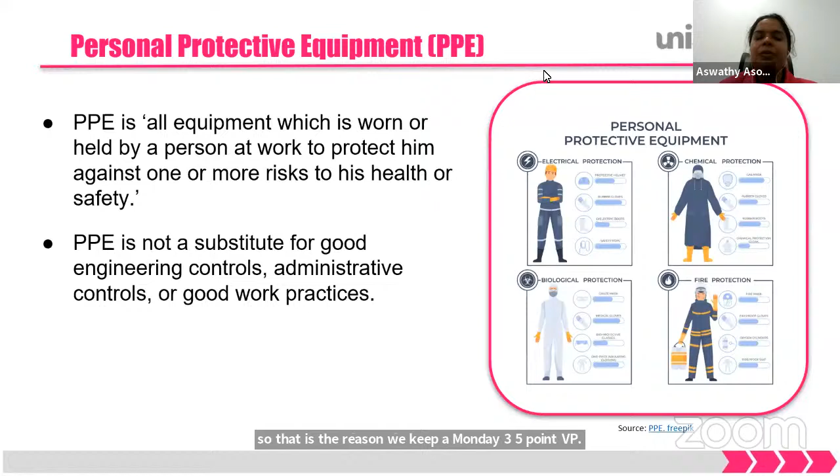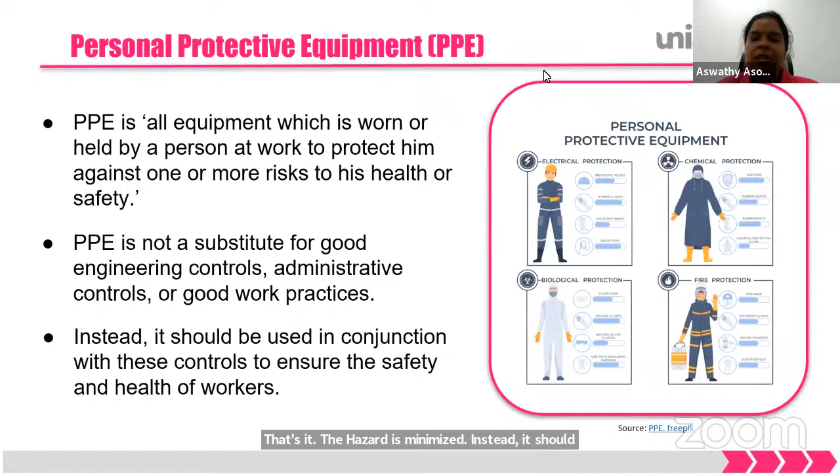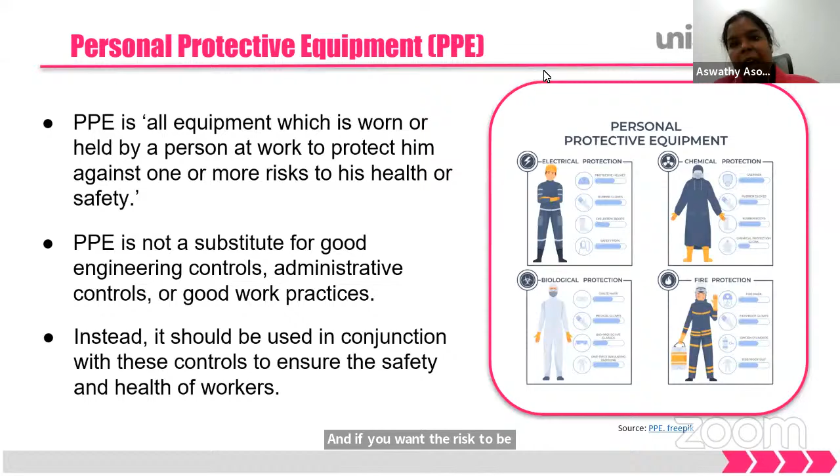PPE is not a substitute for good engineering controls or administrative controls, but it is good practice to make sure the hazard is minimized. It should be in conjunction with controls to ensure safety. PPE is just mandatory to make sure the hazard intensity is reduced. If you want the risk properly assessed, proper engineering control and good work practices have to be maintained.

As I informed you earlier, this is my last session, last slide. From the beginning, I've been focusing on one thing: safety first. In the case of health and safety, safety is first, and it's everyone's responsibility.

Now let me give you a small brief about environmental management. Since we are working in construction, and since I told you about an integrated management system and quality management, and discussed health and safety thoroughly, let's look at the environmental management system. Previously, environment was completely ignored.

We had the luxury to use all virgin materials; we weren't bothered about materials, because if you have money, you can procure everything. But now we've come to a situation where the temperature has increased above 1.5 degrees from normal for the last 10 years. The mean sea water level has increased, and all the glaciers are melting. So all these things clearly show there is an environmental impact.

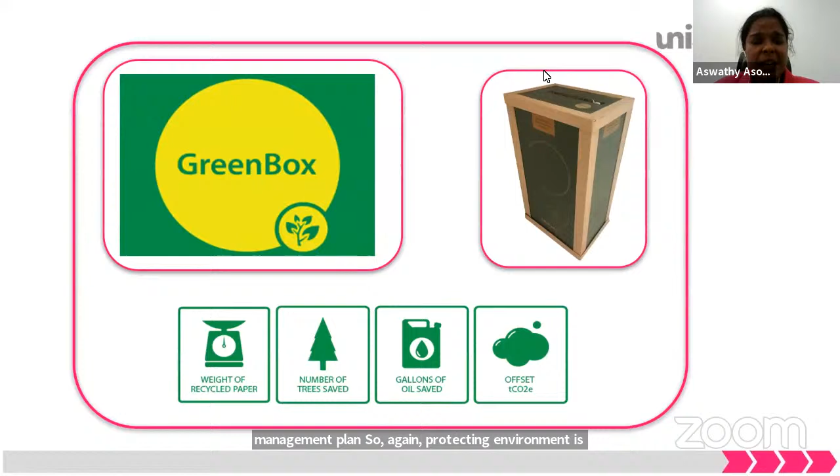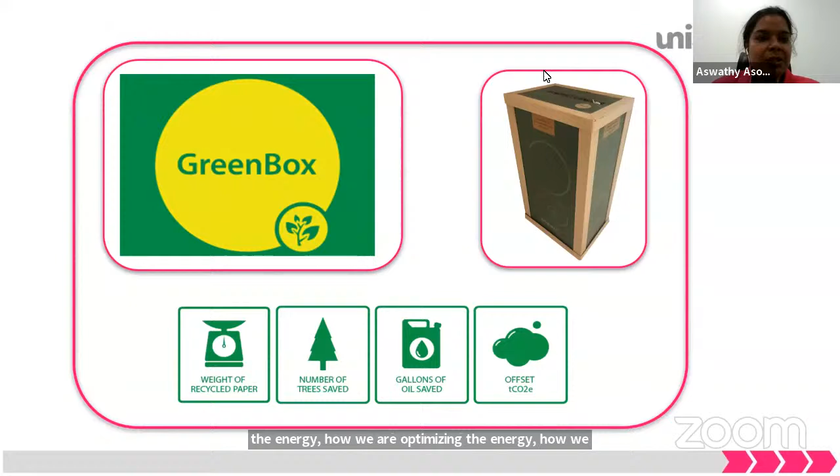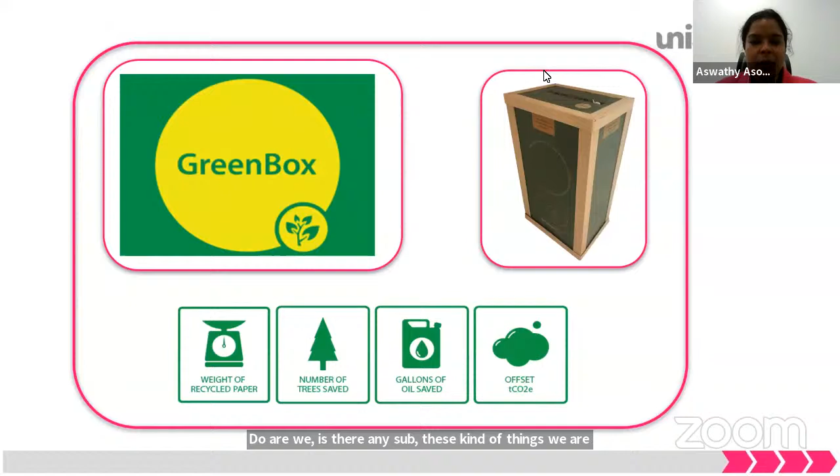Protecting the environment is also everyone's job. In many companies, we have this green box initiative, where we come up with how much carbon dioxide footprint we are reducing, what measures we take, how we optimize energy, how we optimize the usage of cement, what kind of admixtures we use, and whether there's any alternative for cement. These kinds of things we plan and resolve, and these activities come under the green box.